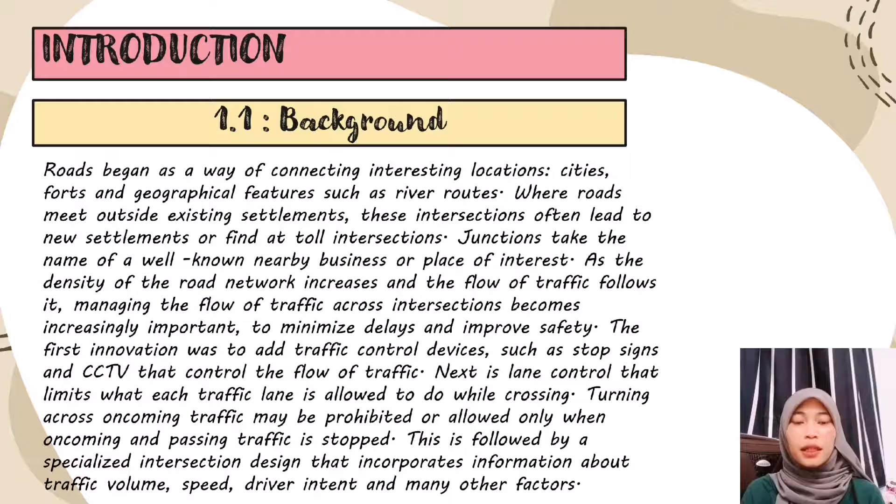Problem statement. The intersection combines several roads and opposite directions of traffic, causing the movement of vehicles in one direction to be relatively slow despite the presence of traffic lights.

In addition, road design conditions that only allow one vehicle can also contribute to long traffic congestion at a time. So to improve road safety, we need to design and build effective intersection design and traffic management to correct the problem.

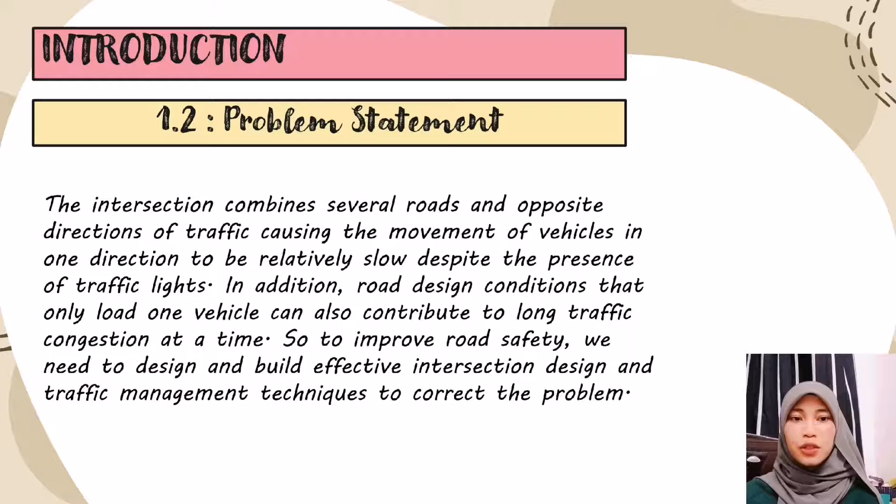Objective. First is to determine the traffic volume and types at unsignalized cross junction. Second is to design a two-phase traffic light controlled junction. Third is to propose appropriate traffic management techniques at the cross junction.

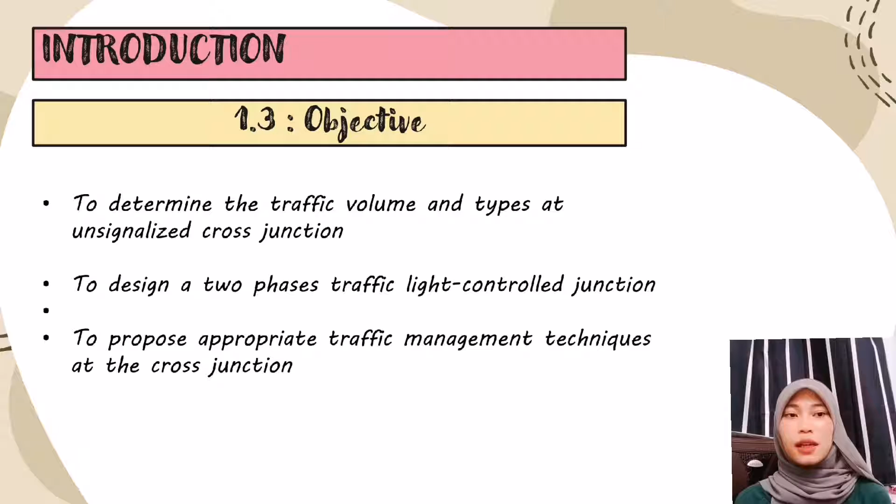Limitation. Roads in our country have intersections that allow vehicles to move from various directions. But intersections like a T-junction, the Y-junction and the middle block have become problems and conflicts.

To ensure no problems at intersections, we need to know traffic rules and management. As road users, we cannot expect traffic police to observe and control the road at every intersection.

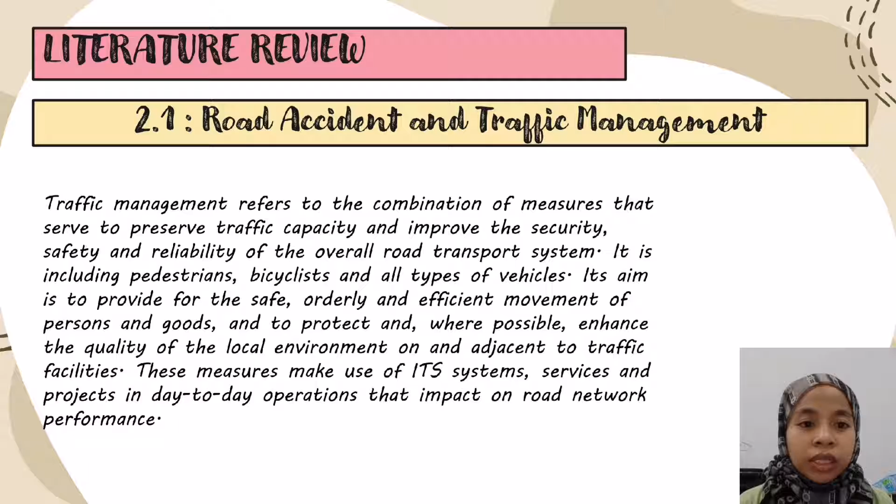...the quality of the local environments on and adjacent to traffic facilities. This measure makes use of ITS systems, services and projects in day-to-day operations that impact road network performance.

Second, types of conflict at cross junctions: car accidents, motorcyclist accidents, bicyclist accidents, lorry accidents, bus accidents and van accidents.

Third, techniques reducing conflict at cross junctions. Technique to reduce conflict points. Which method is better? In this case, the use of traffic signals and the use of channeling is advisable because...

...it is useful to control traffic to a certain extent. If it becomes heavy, then diverting may be another option, which is not easy.

Fourth, traffic control devices at cross junctions. First, traffic control devices are signs, signals, pavement markings and other devices placed along highways and roads to move vehicles and pedestrians safely and efficiently.

These devices are placed at key locations to guide traffic movement, control vehicle speed and warn of potentially dangerous situations.

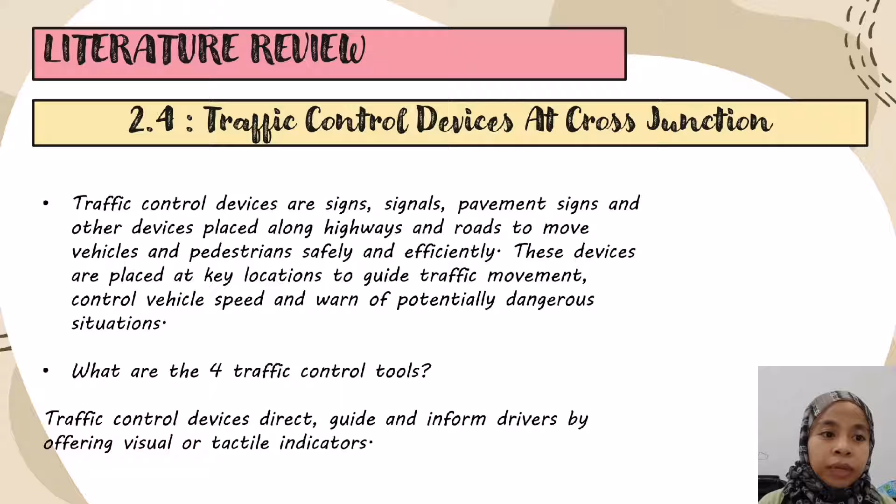What are the traffic control tools? Traffic control devices direct, guide and inform drivers by offering visual or tactile indicators.

Devices are divided into four main categories: first, signs; signals; road design and marking; and lastly, barriers or conduits.

What is the importance of traffic control devices? Traffic control can be used to address the movement and developments of cars and other transportation frameworks.

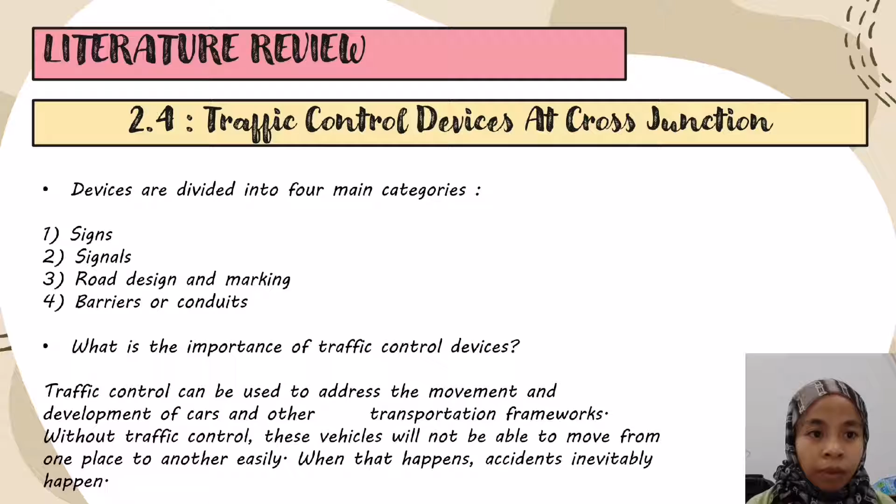Without traffic control, vehicles will not be able to move from one place to another easily. When that happens, accidents inevitably happen.

Road user safety at junction.

What is a road? A road is a long piece of hard ground built between two places so that people can drive or ride easily. Traffic is the movement of people and vehicles from one location to another.

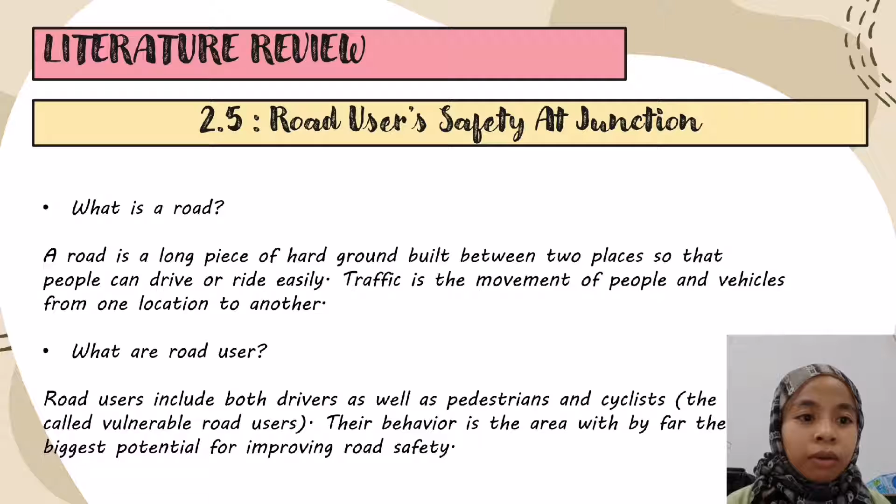What are road users? Road users include both drivers as well as pedestrians and cyclists, the so-called vulnerable road users. Their behavior is the area with by far the biggest potential for improving road safety.

Road user safety: road traffic safety refers to the methods and measures used to prevent road users from being killed or seriously injured. Typical road users include pedestrians, cyclists, motorists, vehicle passengers, horse riders, and passengers of on-road public transport, mainly bus and tram.

The basic strategy of a safe system approach includes sidewalks, curbs, and traffic signals.

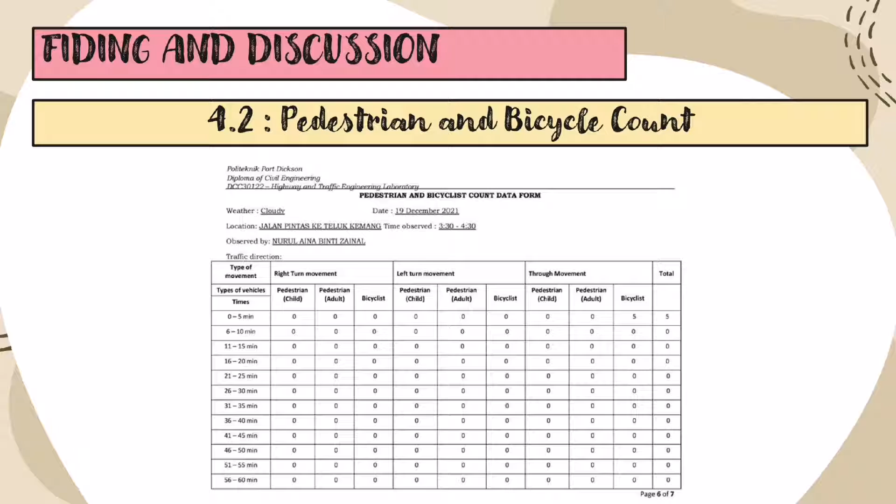Lastly, conclusion and recommendation. First, a new intersection design.

Based on a study conducted by the Washington State Department of Transportation, roundabouts are safer than traditional traffic control boards or traffic signal controls. At the roundabout, the driver will slow down the vehicle. In addition, the roundabout makes the driver slow down because there is no light to beat.

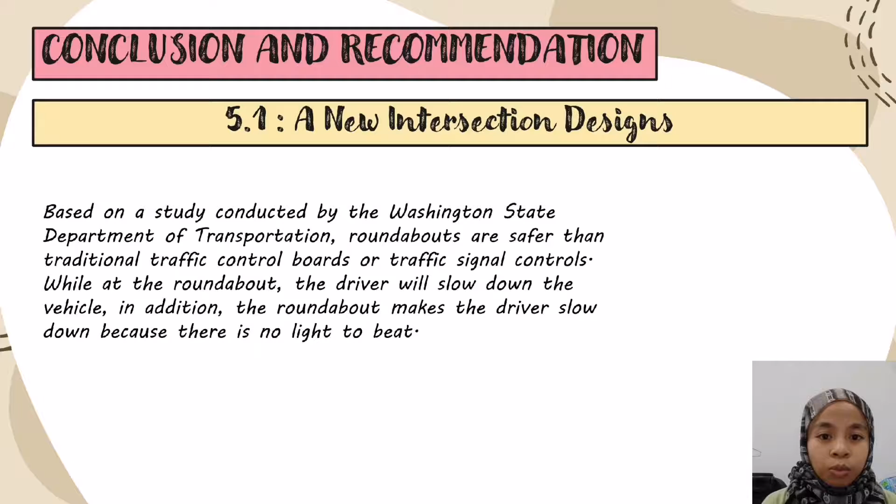Recommendation: impact on the environment. Since vehicles are not required to stop at roundabouts, idle time and stop-and-start movement can be reduced compared to traditional intersections. With this change in vehicle operating pattern, intersection users will experience reduced noise and improved air quality as well as reduced fuel consumption.

Second, icon area value and aesthetics. Each roundabout will be decorated with various arches and icons of their respective areas. This can also be one of the attractions for a district or town.

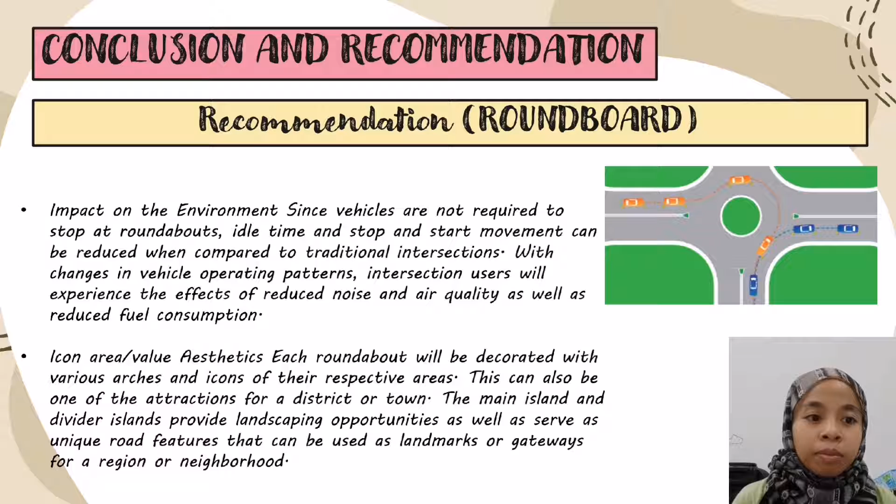The main island and divider islands provide landscaping opportunities as well as serve as unique road features that can be used as landmarks or gateways for a region or neighborhood. Traffic management techniques at the cross junction.

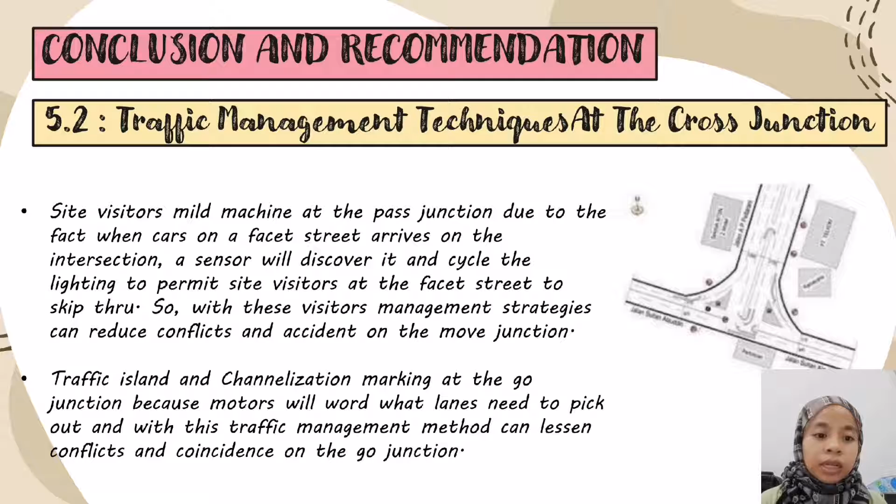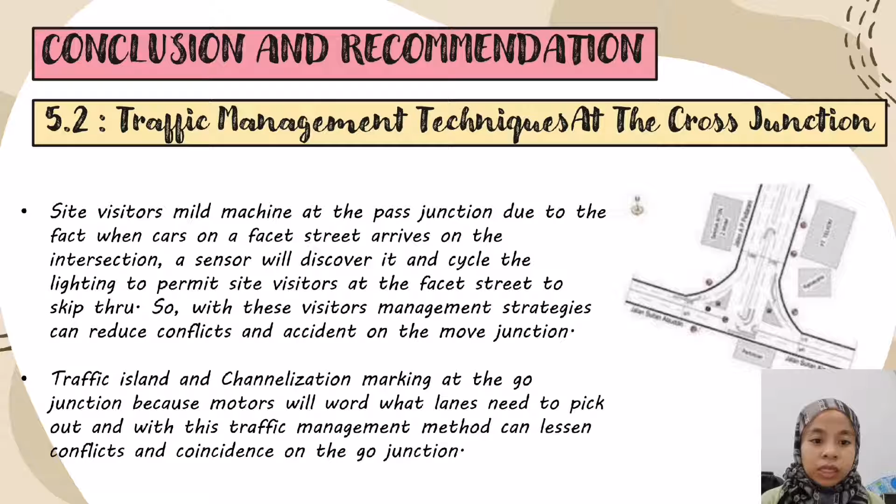The second is traffic island and channelization marking at the junction, because motorists will know what lanes to pick. With this, traffic management methods can lessen conflicts and accidents at the junction.

Next is maintenance at intersections. An intersection is an at-grade junction where two or more roads converge, diverge, meet, or cross. Major intersections are often delineated by gores and may be classified by road segments, traffic controls, and lane design.

An intersection is an area shared by two or more roads. This area is designed for vehicles to turn to different directions to reach their desired destinations. Its main function is to guide vehicles to their respective directions.

Traffic intersections are complex locations on any highway. The most common strategies include improving signal timing, removing elements that hinder sight distance, making drivers aware that they are approaching an intersection, and improving bicycle or pedestrian facilities at the intersection.

One of the most practical ways to make intersections more predictable is to install street traffic lights. While these lights can be conventional safety lights, there are several models that allow traffic control officials to install sensors on lights to change timing and improve the security of the area.

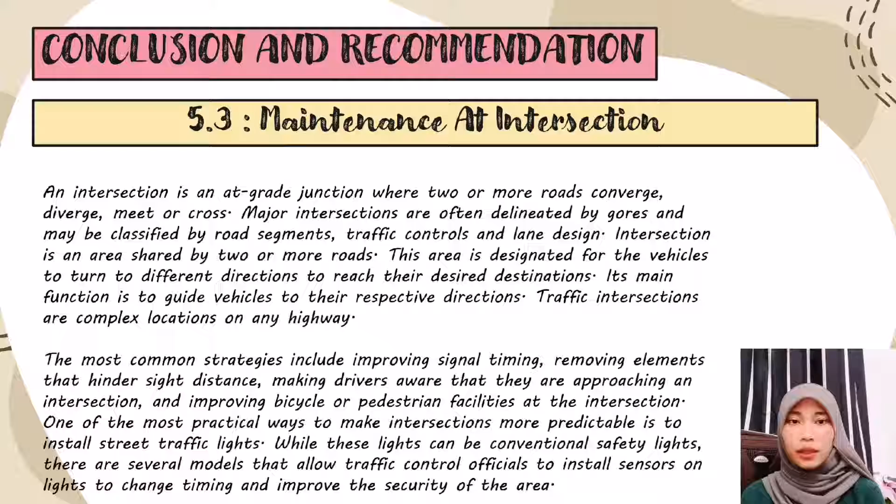Taking a safe system approach means proactively designing the roadway or intersection features in a way that anticipates human errors and reduces the risk of severe injury or death due to a crash. A safe system approach to intersection design can include strategies such as minimizing and modifying conflict points.

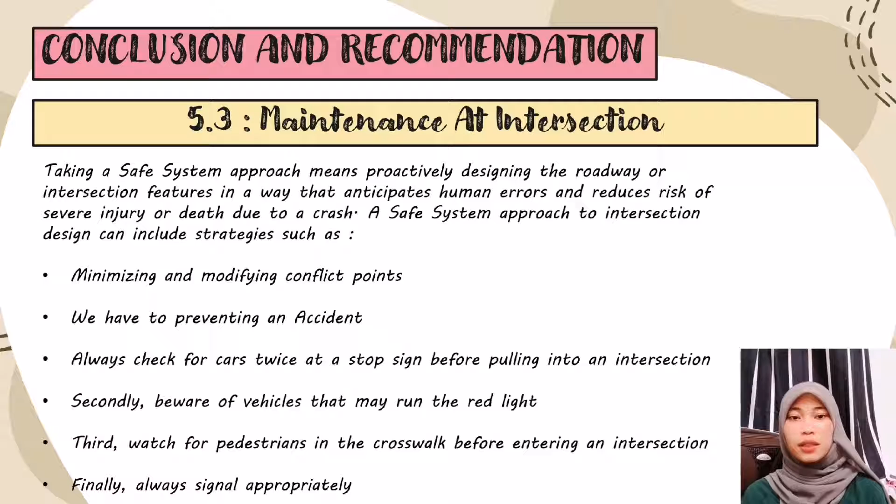To prevent an accident: always check for cars twice at a stop sign before pulling into an intersection. Secondly, beware of vehicles that may run the red light. Third, watch for pedestrians in the crosswalk before entering an intersection. Finally, always signal appropriately.